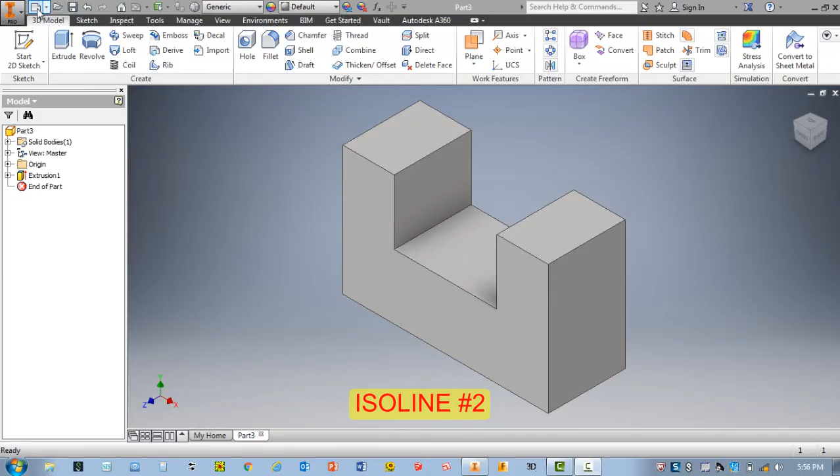We're going to continue using a standard, which is inch part, so I'm going to double click.

You'll notice that there's a part number. Don't worry if your numbers are different than mine. If I click here, this is the last drawing, but this is the drawing I'm currently going to be working on. My Home will take you right back to your home menu, but I want to continue with this new drawing. Okay, we're going to go ahead and get started.

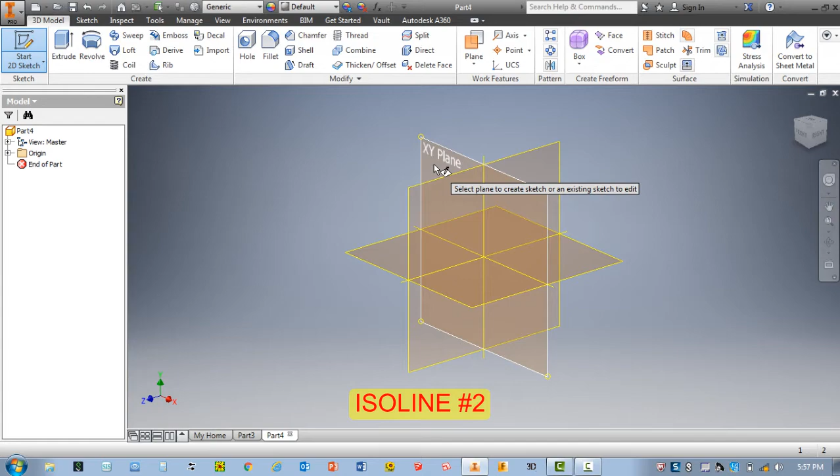Like in the last video, you can either select Start 2D Sketch here, or right click and select New Sketch. For Isoline 2, I'm going to be using the XY plane, which is my front view plane, so I'll select the XY plane and click on it. If you're more comfortable in isometric, you can draw isometric, or if you want to look at it more as a flat two-dimensional shape, you can click on the front option. We're going to start with the outline of the front view.

So I'm going to start with a line. I can either click here, or right click and select Create Line. Like before, this has a length of 4 and a height of 2.5 in the front view.

So I'm going to click once here at the origin, single click. As I move up, I can see numbers. I'm going to type in the height, which is 2.5, and hit enter.

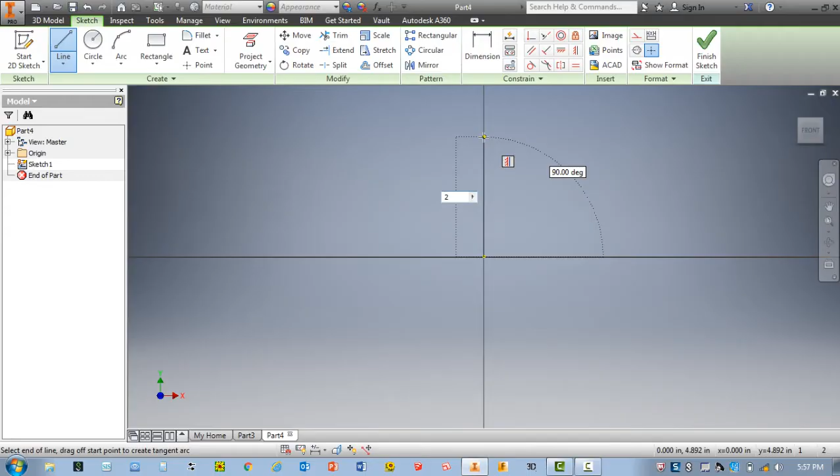Now this time around, we're going to select Zoom All right here. You can also double click on your scroll wheel to do the same thing, which will make this a little easier to see on the screen. If you find you've zoomed in too much or not enough, you can roll the mouse in or out to zoom.

So I'm going to keep moving over in this direction, and according to my drawing, this is a distance of 4. So I'll type in 4, enter. Once again I'm running off the screen, so I'll select the Zoom All button again. There we go, that looks good.

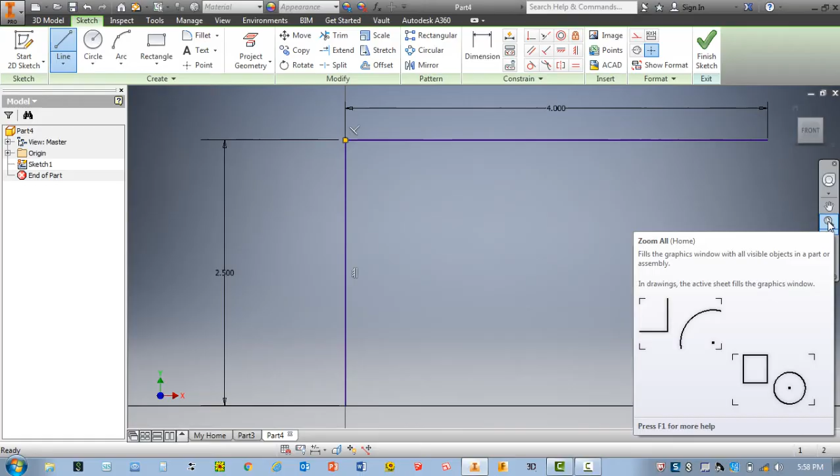I'm going to come down, and looking at my drawing, I know this has a distance of 3/4, or 0.75. And looking at my drawing, I know I can come over here 1 1/2 inches, which is also 1.5. If you do some simple math, you'll find that the distance from here to here should be 1 1/4, or 1.25.

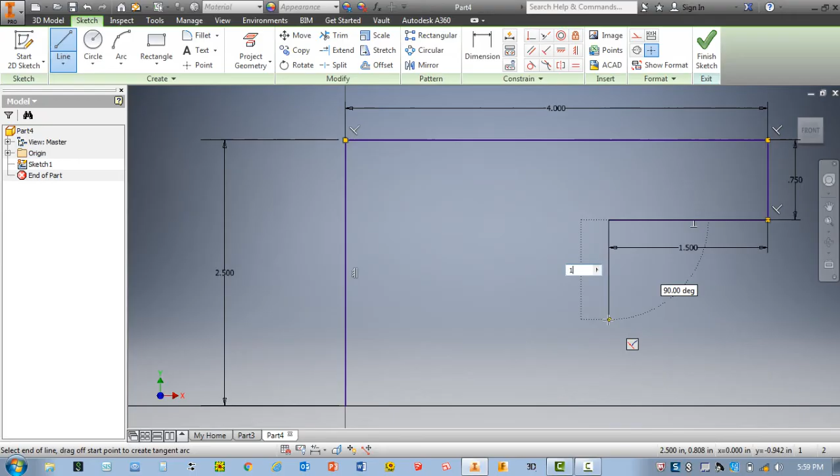As I move over here to the right, if I just touch this point here, I'm going to come down - you can see that it found it, click again. And I'm going to come down, click, and come back over here and finish this.

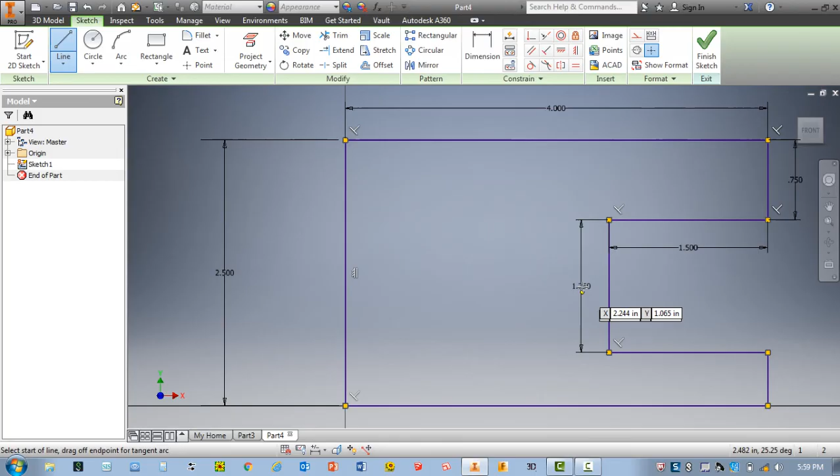Now, I did make a mistake - maybe I did or didn't do it intentionally, but let me show you how to fix something here. You'll notice that this is 1.25, but actually my drawing says it's 1 inch. I made a mistake, so I'm going to hit the Escape key a few times on my keyboard, upper left-hand corner. If I take a dimension, this is very good knowledge to know.

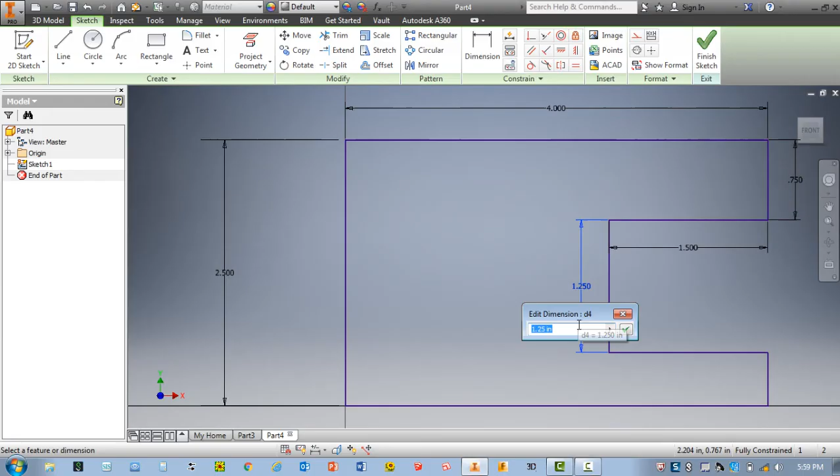You can always change a dimension by double-clicking on it and fixing it. I'm going to type in 1, and hit the check mark. Okay, you can now see this is correct. I know without even a dimension that this is also 0.75.

Everything else looks great, so as we always do, we're going to select Finish Sketch. Now, a lot of times whenever I extrude, I like to go more to an isometric view, so I'm going to click on the little house up here in the upper right-hand corner.

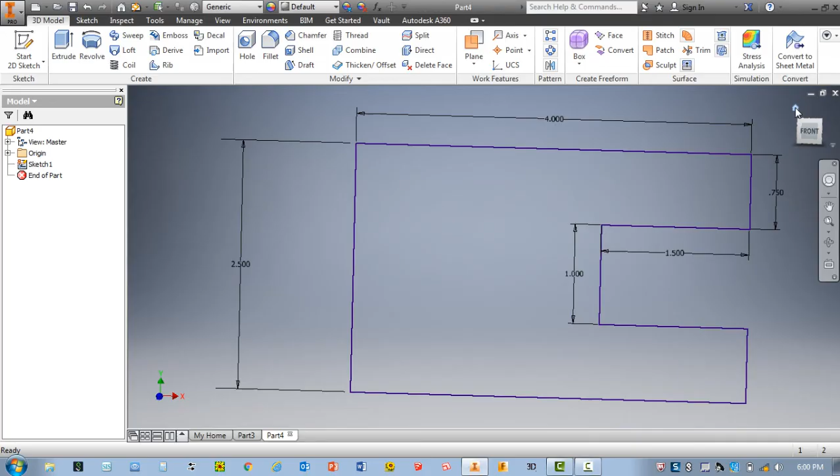You can either select E on your keyboard for extrude, select the extrude icon, or right-click and select extrude. There it is. Like I told you in the last video, you can change the direction of the extrusion by clicking and dragging the arrow in the direction you want to go. Another way is to use this window here - you can extrude towards you, or away from you.

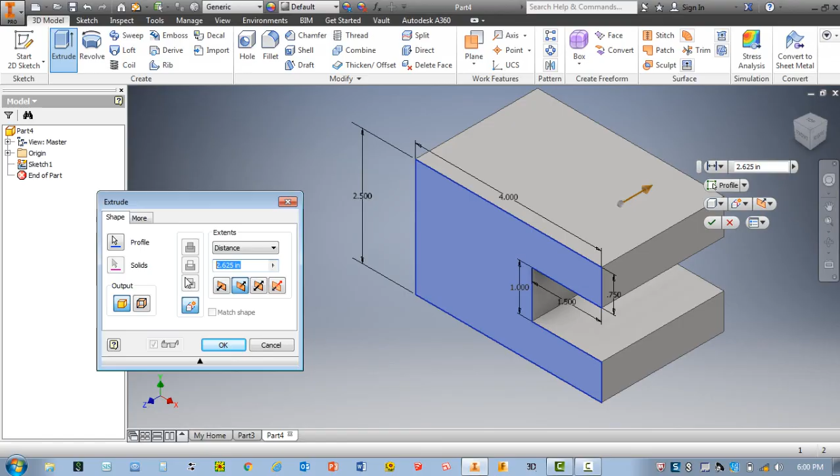Since we're going to put it a distance, we're going to type in 1.5, and select OK. As always, I'd like you to make sure that you return back to Zoom All so the drawing takes up most of the screen, and make sure you hit that Home button one last time, then go ahead and save your Isoline 2 drawing to your Isoline and IsoCirc folder on your H drive.